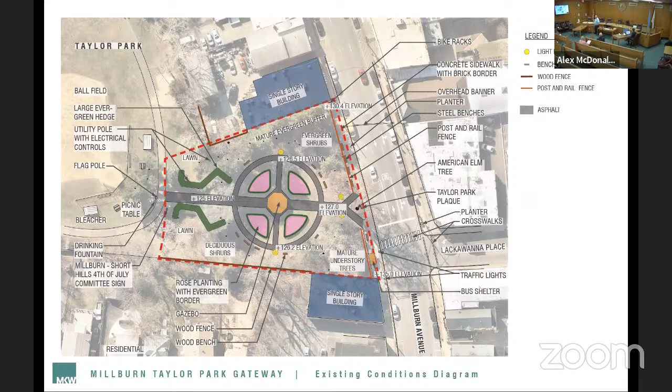Okay, so Jesse, if we can go to the first slide then. It's the cover. Just to recap, what we saw a couple months ago will be the first few images that we have to share with you. This is our existing conditions diagram. Millburn Avenue is that roadway along the right side of this drawing. And I think it's very clear to see the 4 parterres of the rose garden, which are rendered in that pinkish kind of color. Of course, you come down into that area from the sidewalk of Millburn Avenue. You sort of circumvent the existing elm tree that is there. You go down in elevation a bit. There is the gazebo in the center of the rose garden, indicated by that orange octagon on this particular plan. And then you're able to walk around the rose garden and through it into the larger portion of Taylor Park. There are some existing yew hedges that you see in those crinkle sort of shapes in green right along in there. But I'm sure a lot of people are very familiar with the space itself. We've been there a number of times. We've looked at the photos that we've taken as we've been developing our designs as well.

And with that, we're going to take a look at the first of our designs. I'm going to hand this off to Jim. Thank you, Al.

Obviously, the first thing we wanted to mention is we've reoriented the site as you're looking at it. Before, it was kind of tilted on its side. Now we've put Millburn Avenue at the top of the site, and the rest of Taylor Park is now at the bottom of the drawing. So we've kind of spun it a little, and now north is up.

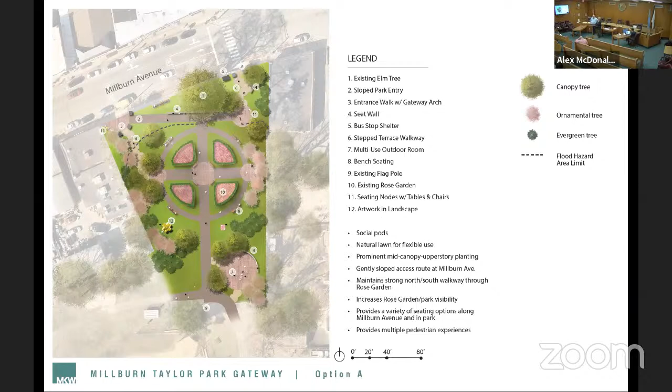Okay, so with that, Ryan's hanging up option A. Let's move on to option B.

Option B, once again, fits into the overall townscape there with Millburn Avenue and Lackawanna. In this one, it's a little more important to stop on this slide and see that we're reusing some of the graphics we did in the last option, and that piece of artwork that was down here has now been pulled up into that corner of the site.

Why? Because now it's a highlight as you look down Lackawanna, you come out of the train station or you're just driving down Lackawanna. Now you have something to focus on that draws your eye into the park and makes it an attractive connection, either from the reservation or the train station, and it'll start to draw people down into there and say, what is that? Why am I, I want to go there and see what that is. So that's why this is a really important broader view for this one.

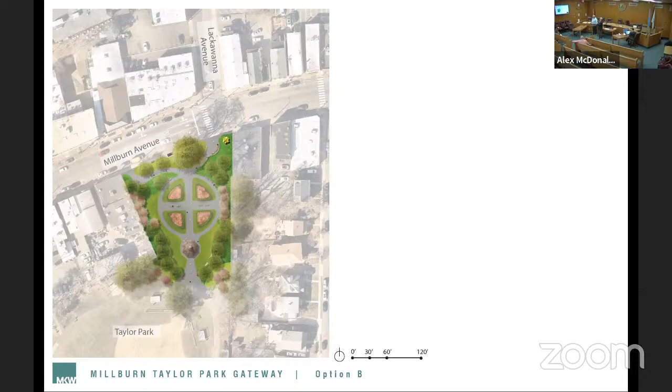But let's move on to the zoomed in version. So we worked that same concept of two entries along Millburn Avenue, but in this case, instead of that straight line and the little curved hard circle areas, we waved it a bit more, just to make it a gentle walking area that you can meander, as opposed to getting to the point and relying on the axes of the rose garden.

Where number 2 is on the top left of the drawing, the walkway wanders through, but we did have a little peel off just at the bottom left of that. There's 3 benches in that area. Go ahead, up a little higher, left a little. There you go, 3 benches in that area. And then the path kind of wanders through.

Because we're wandering and things are meandering a little bit here, we don't have that as much length, so we have to have what is actually an accessible ramp. There's a ramp with handrails on that side, just to the right of the number 2.

On the right side, the entrance is much broader. There's a little bench area as well on that, where I think that's a 6. No, that's an 8, my eyes are failing me.

But then below that, number 3 — instead of the last option, where we had broad steps with 2 steps and 2 steps and 2 steps — where number 3 is now, it's just one big set of steps. You're going to go up and down that full grade change right then and there. It'll bring you down, and you'll be at grade by the time you get into that center axis of the rose garden. Very good.

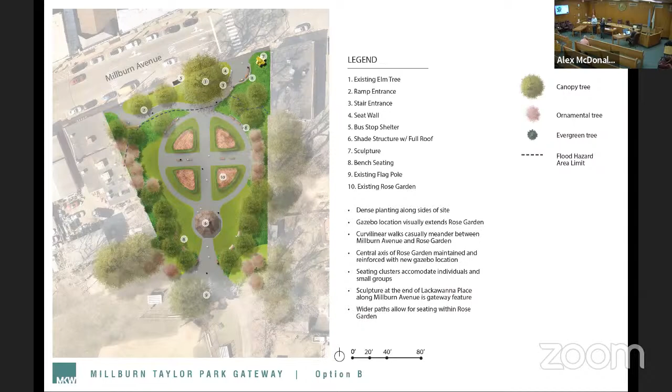Okay, so Ryan's placing the next option up on the wall. With that, we'll go to option C. Option C really has two parts to it - there's a C and a C1.

This is how it fits into the overall plan. At the end of Lackawanna, we see artwork there, and we're hoping to work with somebody to create artwork that also doubles as a bus stop, serving dual purposes. There's one less element out there along the Millburn Avenue streetscape as well.

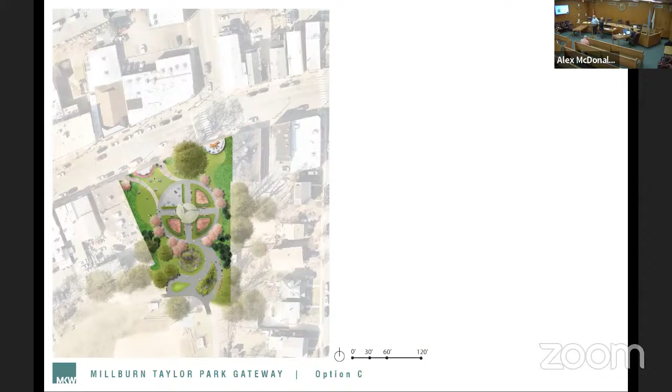Let's zoom into C here. The most obvious part of this one shows one of the quadrants of the rose garden being changed out into more of a people plaza - bringing a larger group of people down into the rose garden with more tables and chairs, really giving that as a community gathering space within the rose garden so people can enjoy that space and the roses around them.

Another difference in this one - the axis that everyone sees of the rose garden is traditionally north-south and east-west, but we're turning it a little bit in this case so you're coming in more from the left side of the drawing and looking across. There's a plaza at number 7, and then you look straight out across the lawn and across the leaf-shaped gazebo in the center of the rose garden, across to a backdrop of ornamental trees. So we've shifted the visual axis of the rose garden.

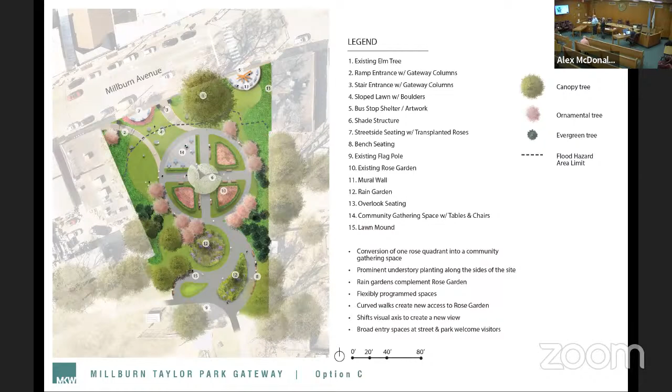We know this option might tweak some people because it's taking one piece of the rose garden out, but we wanted to try it and see how it would play out. To go along with that, we created option C1 to see what happens if we keep all four quadrants of the rose garden, and then shift that seating area that was in the northwest quadrant off to the edge, letting it sit into that landscape edge around the side of the sloped lawn. I think that this is that option.

We like the fact that 15 has room for additional tables and chairs. We like the fact that it ties in nicely to that curve coming down that sloped walkway.

It looks kind of paved in there, but we did put a tree right in the middle of it. We faded the tree out a little bit so you could see all the tables and chairs underneath. We think that would provide nice shade for that space as well.

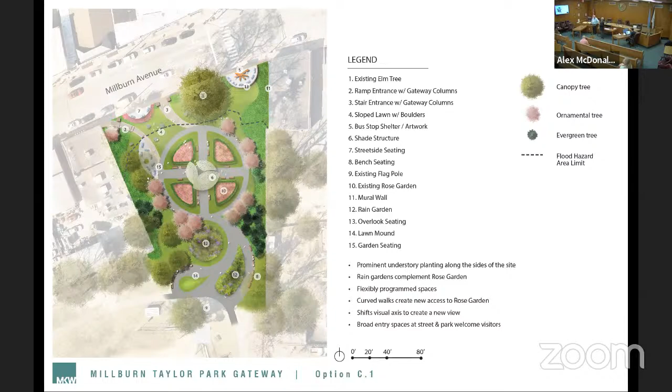So C1 and C are very similar, so I'm not going to dwell on it too much. It's a nice look, but it's definitely a different feel because we went back to the full rose garden as is in this one. Anything you want to add to this? No, I think you pretty much covered it.

So you would walk through these. Absolutely. Thanks, Jim, that was great.

I hope everyone has a good understanding of the process we've gone through in developing these. As we said, you'll have a chance to look at these more closely with the plans up on the wall. But we just wanted to finish up with a couple more slides of some of the primary elements and what those might look like, that we just talked about in a number of these schemes.

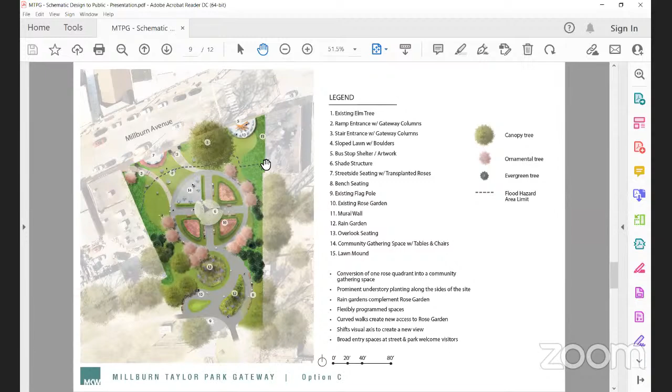Thank you very much. I'm sorry if I sound mixed up, but I am a little mixed up. So I want to be able to vote the way I want. They all seem pretty, they all have the pros and cons, I guess. But I really appreciate it. Thank you, Susan.

Okay, we'll go to a comment here in the room. Hi, good evening. I think it would be prudent if we did try and do an online survey for at least a week, like we've done with other things, just because there's only about 15 people online and about 10 or 15 in the room.

And I think it's important that it's almost like a menu, I want to take one piece off of one thing and one piece off of another thing and add this element and that element. I think we're kind of locked in and limited, if we pick this, let's say B, we pick B, but we like something else that's in C1 that we want to incorporate. I think it's important that we get to say the things that we do like. I don't know, there's not enough of us here.

I think we did have over 1,000 people sign up on that Save the Walbridge Gardens. And so to have 1,000 people sign up for it, and it's June and people are busy with different events going on, it's been my experience that always the second time someone comes back, they don't show up, and it continues that way. So I believe we should try and have some type of survey, some open survey where people can get on and give their opinions. I just don't think there's enough data points here. It's just not.